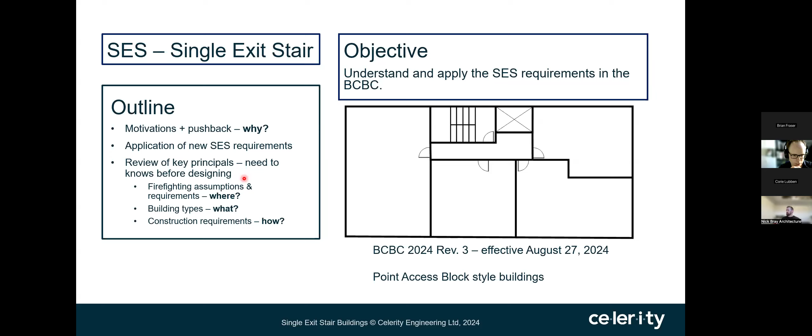In terms of outline, we're going to discuss motivations and pushbacks, why this is coming up now, what we're hearing in terms of pushbacks against these requirements in the industry, go over the application of these new requirements, the mechanism in the code for how to make this work. And then we'll talk about the key principles, what you need to know before designing. This includes where can you build these, mostly related to firefighting assumptions. What do these buildings look like? And all of these specific construction requirements, which I'm calling the how, the nitty-gritty stuff.

So why is this coming about? The primary motivation for this is related to housing supply. So it was a BC government-led initiative. They worked with private industry to study how this could be done in a code revision, and that went through, I think, several peer review processes and was implemented. So it didn't go through the normal national level code review.

That hasn't happened. I believe probably the main reason for that is that's a fairly slow process. You know, there's a new code that comes out every 4 or 5 years. If they wanted to get into that code cycle, they certainly could have, but we wouldn't have seen anything in BC for probably, I'm guessing, at least 8 years. So they wanted something faster than that, so they've gone through a different process in this case.

Another motivation is density on smaller lots. With the 2 exit stair design, it can be quite challenging to get your 2 stairs on smaller lots, so you end up with land assembly and higher costs due to that. You can do scissor stairs and things, but it gets a little bit tricky.

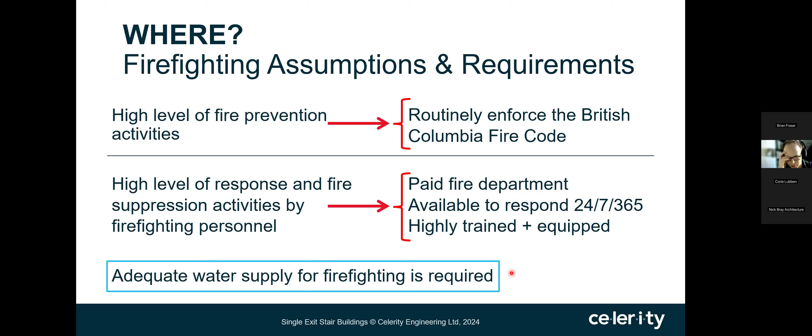Okay, so that's a lot of background information. I guess one additional thing I should mention, sorry, before we move on, is where you can do this. So when the encapsulated mass timber requirements were brought into force, there were specific jurisdictions that opted in to allowing them in their jurisdiction. These requirements are not like that. It just broadly applies everywhere. There's no specific jurisdiction opt-in. It's really just, do they meet the criteria for the firefighting assumptions? That's kind of what it all comes down to. There's no opt-in type of situation like the encapsulated mass timber had.

Okay, so what do these buildings look like? This is probably where most of the interest will be, I think. It'll help you figure out what you can do with these new requirements. So the most significant thing is that these are only for residential buildings, and only specific types of residential buildings, which is general market housing. You're not allowed to use it for hotels, motels, dorms, senior residences, and other types of specialized residential occupancies. So general market housing is all that has been considered when coming up with these new requirements.

One thing that I've noted as I've gone through these and looked at a few projects is there's no commentary on subsidiary uses like parking or storage. It doesn't really address that at all. It doesn't say if it's allowed, or, for example, if you do have underground parking, are you allowed to have only one exit from there? Can you have two? I'm not completely sure about that, to be honest. It doesn't seem clear to me. So I think that's a topic for future research, for an update at some point.

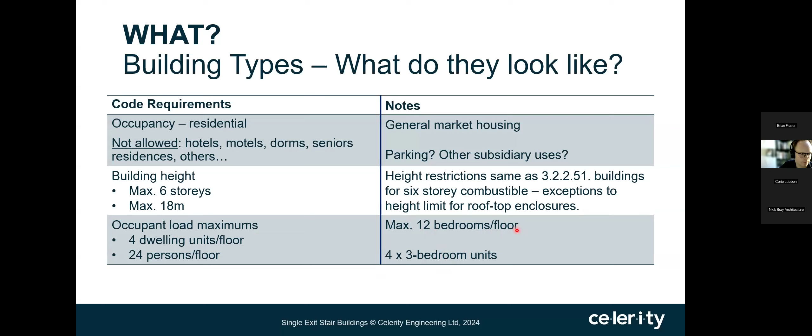Occupant load maximums: the code limits you to 4 dwelling units per floor and not more than 24 persons per floor. So essentially, this means 12 bedrooms per floor. In practice, that might look like four 3-bedroom units. You usually don't see anything over 3 bedrooms in apartments, but you could have over 3 bedrooms in a unit as long as you're not exceeding the 24 persons per floor. The 12 bedrooms per floor is just based on the 2 persons per bedroom that's typically applied for occupant load in the code.

Okay, continuing with what these look like. Travel distance is another significant thing that will effectively limit the area of these buildings. So although, based on the 3.2.2.51 construction article, you're allowed up to a certain area limit, I think the travel distance limits in here will effectively reduce that. You won't really feasibly be able to go close to that limit, I don't think.

So we have 25 meters to an exit from the furthest location. You have to look at every location on your floor, and whatever the furthest is has to be a max of 25 meters to the exit door. And note that's actually all the way to the exit, not to the suite door. There's no allowance for measuring it to the suite door. So it's quite small, and that's consistent with the existing single egress requirements for a sprinklered building. And then the other thing is a 6-meter travel distance from the suite door to the exit within the public corridor.

And one thing that's interesting: keep in mind that the dead end corridor limits still apply. So in this example here, if this was 6 meters to the exit door, that would be fine. But if you put the exit door over on this side, it wouldn't really work anymore, because these doors over here would probably be over 6 meters, and the dead end distance from the door to the end of the corridor is over 6 meters. So then it doesn't work on 2 fronts.

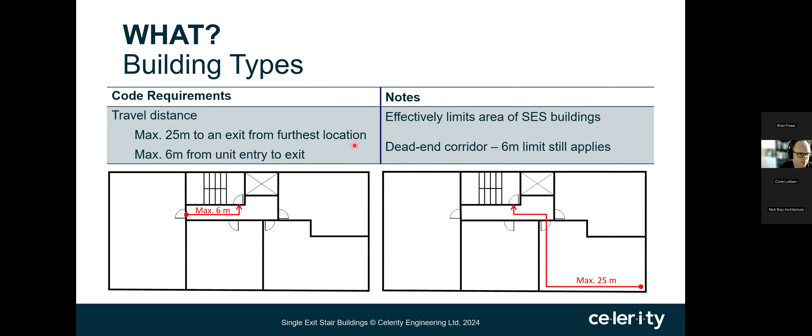Furthermore, if you put this door over here, for example, if you had a corridor in the suite, you might be under the 6 meters to the exit, but if you were over 6 meters to the end of the corridor, you wouldn't be meeting the dead end corridor requirements. So there are 2 things to consider there: the travel distance from the suite doors, and the dead end corridor requirements.

And well, okay. So that effectively limits you in how you can configure your floor, because you do need to have this stair relatively close to the street. So it's definitely something to consider early on in your design. You don't want to have to totally rearrange your units later on once you realize this.

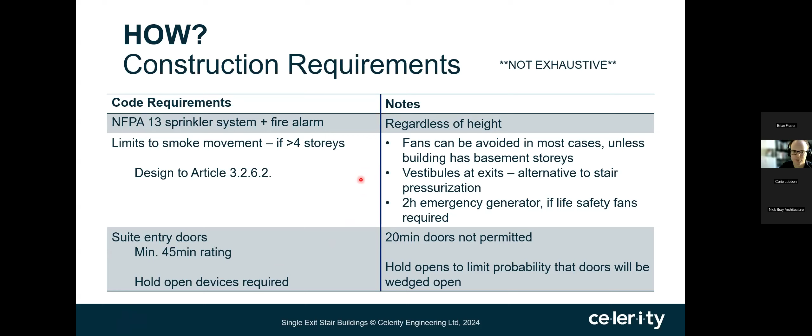I've seen some on a project recently that aren't the typical wall mounted magnets with the two plates. I've seen some that have some sort of electromagnet inside the closer itself. So you can just kind of move the door to any position you want during normal operation and it'll just stay there. But if the fire alarm goes off, then it releases that and it just releases like a normal closer. So there's some options out there, I think, that are a little more pleasing aesthetically than the sort of traditional magnet that you would see for doors in a public corridor, for example.

In most cases, you're going to have drywall finishes for the ceiling and the walls, so that shouldn't be a problem as long as it's typical paper-faced drywall. It will add in a requirement though for floor finishes to be considered. So you will want to look at the flame spread rating and smoke developed classification requirements of the table for the floor finish.

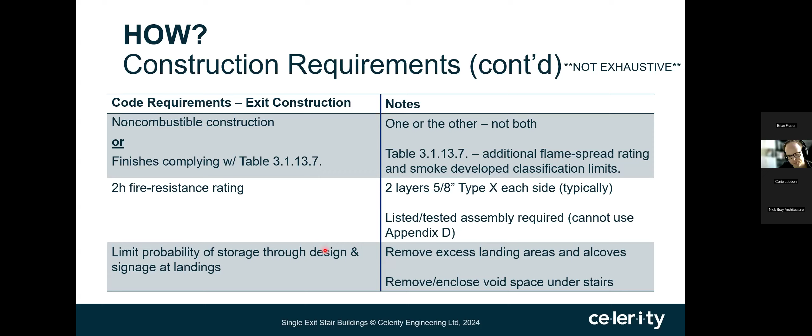I know in my last strata I was in, we had a snowblower stored under the stair for a while, which is definitely not allowed. So these things happen. So it's good to proactively design that out. And I think that's something that should be considered really in all buildings. Although it's limited to this in the code, it's definitely something to consider.

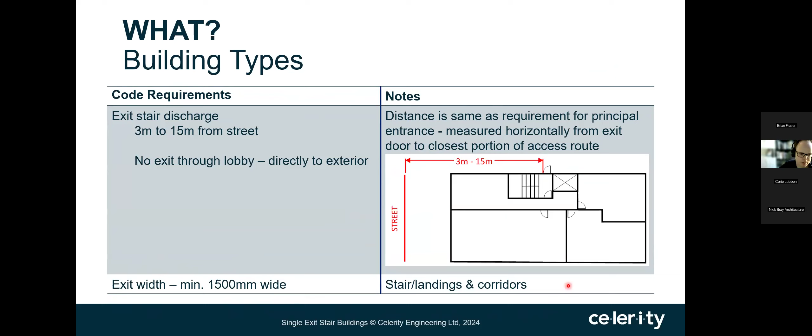I realize I did miss one extra thing here. Exit width. These buildings need to have 1,500 millimetre wide exits. So that includes stairs and corridors if you have a corridor as part of your exit. So that's fairly critical also at the schematic stage where you're blocking everything out. So you definitely don't want to miss that like I almost did.

I think that's it. Thanks for listening. I know that was a bit of a gauntlet, but hopefully it was helpful.

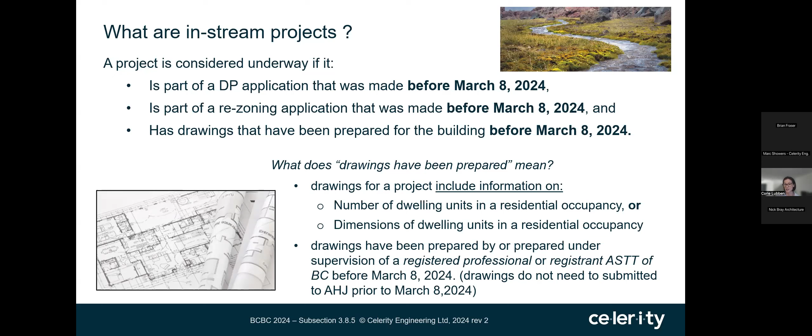So as we know, that includes an architect with AIBC, a professional engineer or professional licensee engineer with EGBC, as well as a registrant of the applied science technologists and technicians under the Professional Governance Act. And so that seems simple, but what this really means is if we are applying one of these three options, the criteria is as of March 2027, which is a long time out, but you need to have those in-stream projects in for building permit application.

And so the purpose behind all this, as has been raised out there, is really to address all the concerns that have been raised by industry, not only costs, but things that have impacted projects with redesign or redevelopment applications, really the feasibility of these projects and moving forward with the changes required to meet the new 2024 requirements when substantial effort has been made ahead of time.

So, as I said, there is an information bulletin, and I urge you all to read it. It's got lots of good information. I just highlighted three of the questions that seem quite informative. So one is, do the drawings need to demonstrate the floor space changes or impacts as a result of the 2024 edition? And the answer is clear, it's no. As long as your project meets one of those three criteria, so the development permit application, the rezoning, or the drawings. And again, that drawing one is a very unclear one.

And our recommendation is really to reach out to the AHJ that you're working with, because it is interpreted kind of gray. There are some opinions out there that these drawings are only submitted because there was no development permit or no rezoning application. So maybe the municipality doesn't have those features required, so you're looking more rural, but there is no consensus and no solid information. We're hoping that something else gets published, but right now you're best to just reach out to the AHJ, see where they stand on it, and go forward from there.

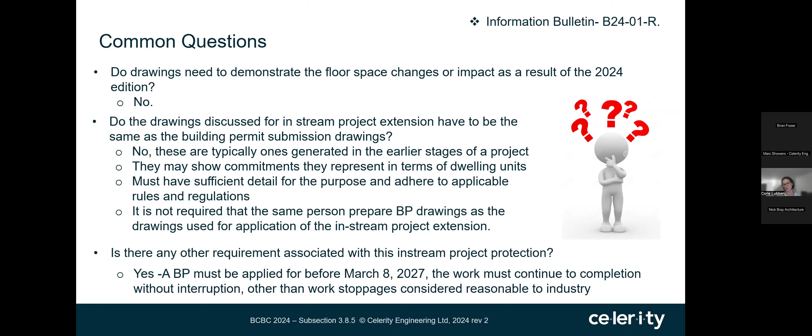And then the last question that I found pretty useful and clarifies things is, is there any other requirement associated with in-stream project protection? And that just reiterates again that although you fall under this, you do have to apply for your building permit by 2027. And again, they're sticking with March 8th.

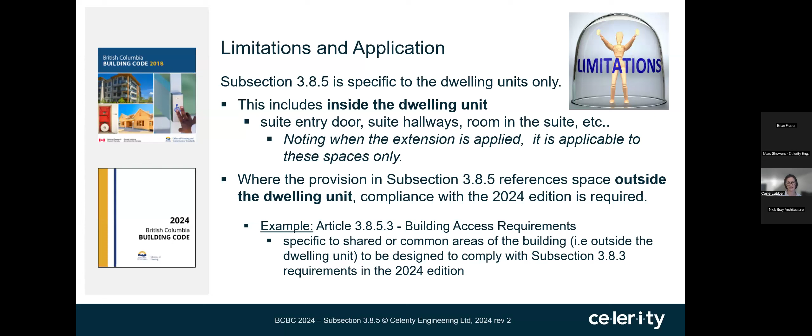So moving forward, these are applicable only to the adaptable dwelling units requirements, and that's section 3.8.5. So specifically, we're looking at the single-storey dwelling units served by that interior corridor and accessible common entrance, as well as common spaces. So we're limited to within the dwelling unit: the suite entry doors, hallways, all the rooms, everything inside. That's where the exemption to apply the 2018 requirements applies. Within 3.8.5, there are requirements that reference outside of the dwelling units, and those are still required to comply with the 2024. So that is good to keep in mind.

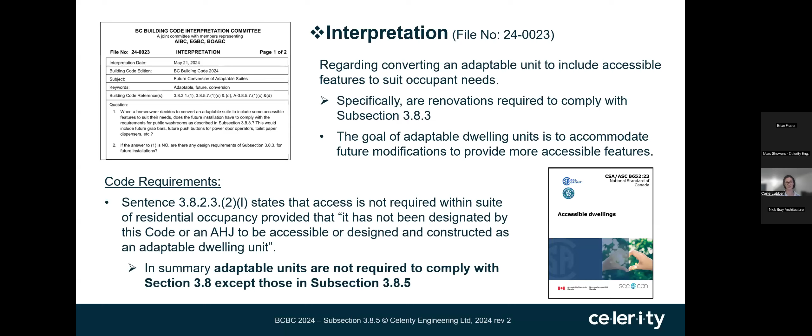So as I said, lots of interpretations are going on. This is one that's very general. Someone was inquiring about doing a conversion inside the adaptable dwelling unit, whether they need to comply with the accessibility requirements. And again, clear answer on this is no. The intent of the adaptable dwelling units is really just to allow the user to make modifications, and those can be different for every user of that space. So there's no requirement to meet the 3.8.2 or 3.8.3 requirements. It is just for the user only.

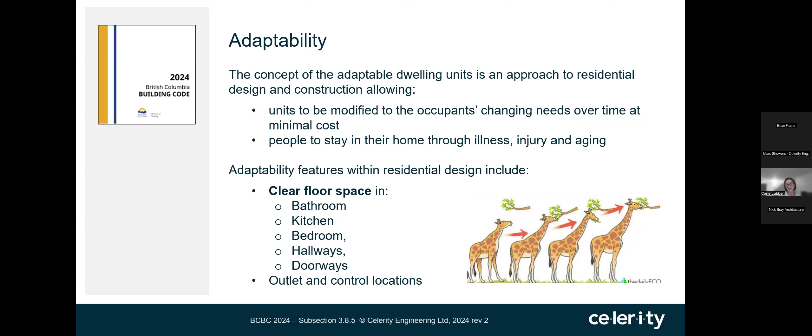And just a quick highlight that we are focusing on having people stay in their place, whether it's injury, aging, or illness. So we just want that space to be easily modified. And as we go through all these adaptability features, you see the focus is really on clear space, because that's something we can't achieve without a major renovation. So there's clear space throughout all the rooms, and then locations of switches is the focus.

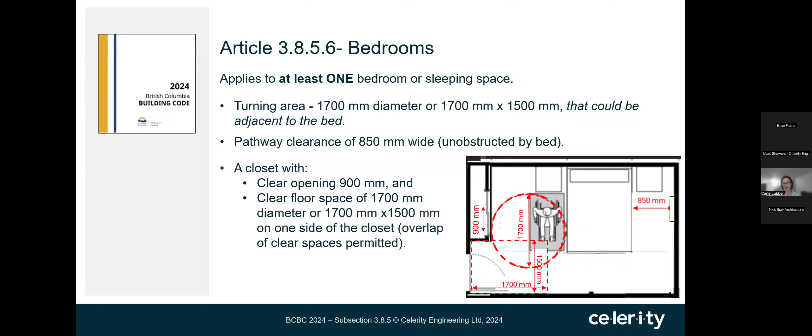One of the new articles within the adaptable dwelling units is the bedroom. And so within it, there's 3 basic criteria. One is for a turning space, could be adjacent to the bed, essentially a transfer zone. You need a clear space in front of the closet, the door, and then an 850 pathway.

This is where there was lots of room for clarification based on how they presented this. And so luckily there's lots of interpretations as well as information out in the bulletin. But one of the interpretations published was very clear that we do not need to show that double bed. That is not mandatory. And the 850 millimeter pathway only requires access on one side of the bed to that transfer zone. The path is required throughout the suite to any kind of controls that are used often, switches or operable windows.

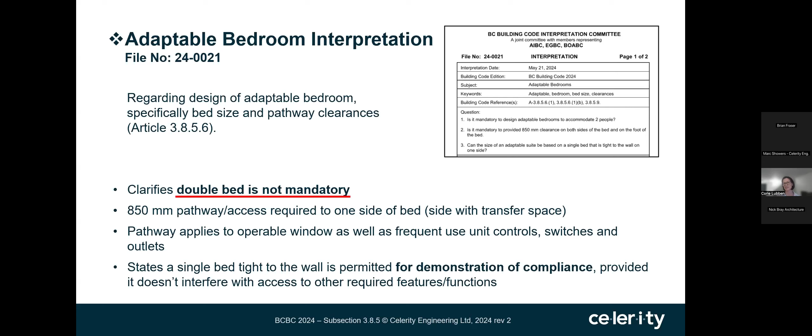But it clarifies that if you want, for demonstration purposes, to show that you're meeting these adaptable requirements within the bedroom, you can have a single bed. It can be up against the wall, as long as there's nothing on that wall or you're blocking space that needs access. So that's definitely clarification. It does also allude to the fact that we have these demonstration of compliance. So noting that we are showing it's available, but it's not necessarily going to be the way it is constructed originally or requiring the furniture.

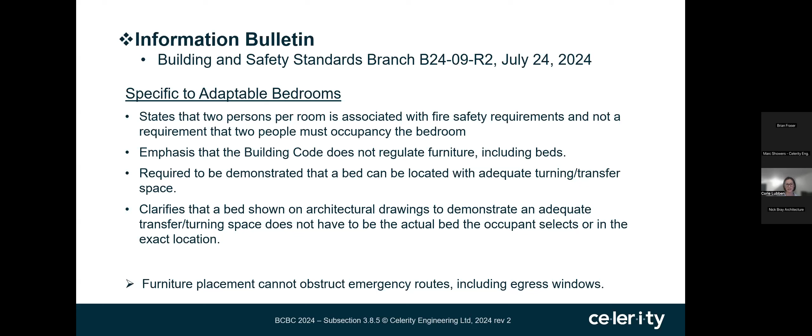So the information bulletin has some more clarification why at the beginning there was a lot of leniency, like, do we need that double bed? And again, they just clarified it for everyone, stating that 2 persons per room is actually more of a fire safety requirement. And so obviously we don't mandate furniture or anything within the building code, nor do we require 2 people to be within the room. So there is that flexibility now on the choice of bed. And again, it does clarify in these bulletins that there is a demonstration drawing, that it doesn't have to be the bed the occupants select moving forward.

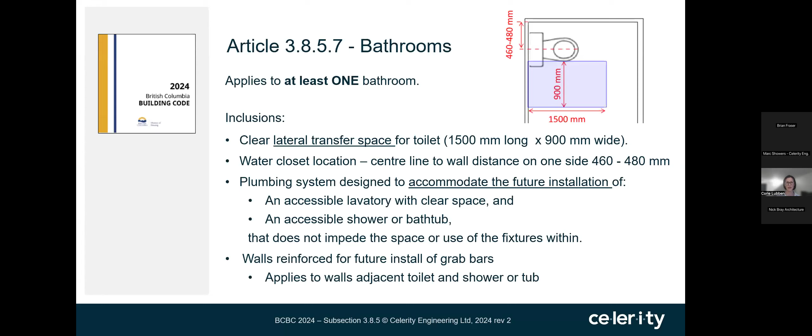So the bathroom is another area. I find there's loads and loads of information out there. So I urge you all to look through the new bulletins and information that's out. I'm going to touch through a little bit. I know we are tight for time today, but essentially the bathroom requirements, we have the lateral space. We have the location of the toilet and the wall. We talk about plumbing fixtures and accommodating the future installation of sinks and showers or bathtubs, and so the clear space needed around it. And then we have the future reinforcement of the wall to accommodate the grab bars.

So one of the great interpretations I think out there is about the toilet. So that water closet is fixed. You need that in your initial design. That just acknowledges that any kind of moving around of your toilet is really a major renovation. So that's the things we're trying to avoid within the adaptable units. So you do have that fixed against the wall, but the water closet is an initial design type thing.

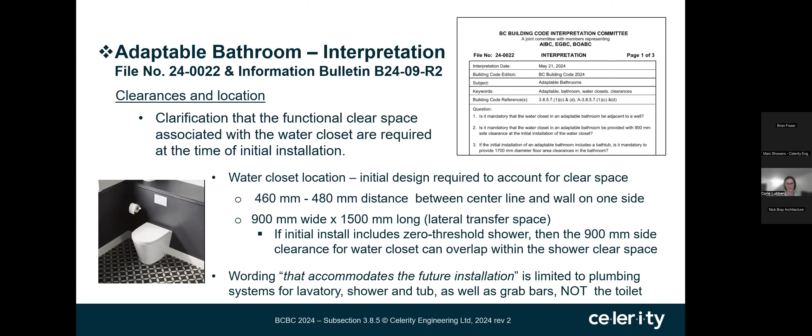Within this interpretation, they do clarify about a zero threshold shower, which is quite interesting. So because your toilet is in your initial design, if you have a zero threshold shower in your initial design too, then you are allowed to use that clear space as overlap for your transfer space in the toilet. So there is encouragement to use the clear spaces that are required for multi-purposes. You don't need to isolate them beside each other. We are allowed the overlap. So with the zero threshold shower, again, that transfer space is allowed to overlap into the shower, which is quite nice.

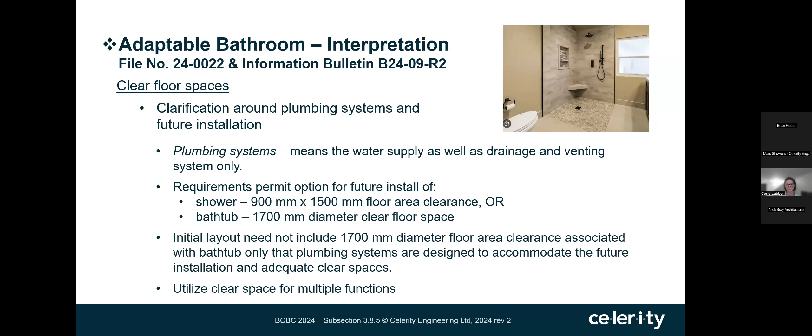Just some more interpretations, clarity around the plumbing systems and what that specifically means, and the installation of the future shower or bathtub, and whether it needs to incorporate that 1700 millimeter diameter clear space. And again, no, it's just the plumbing systems we're looking for, but it does need to account for that clear space in the future design. So there are a number of these interpretations out there.

This is the last one I really want to touch on, and it talks about having a future wall hung sink and whether it can encroach into that clear space of your transfer zone relating to the water closet or the toilet. And so the answer is yes. Within the notes, we also talk about it being permitted to encroach in the clear space of the shower as long as it's opposite the fold down bench.

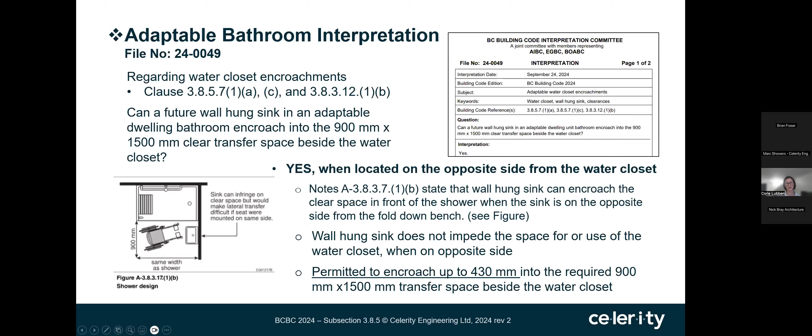So again, as long as the wall hung sink is opposite the water closet, you can have that encroach in the space. And again, it's going to be that 430 millimeter encroachment permitted with the knee space and the clearance underneath the sink. So those are the highlights of the interpretation.

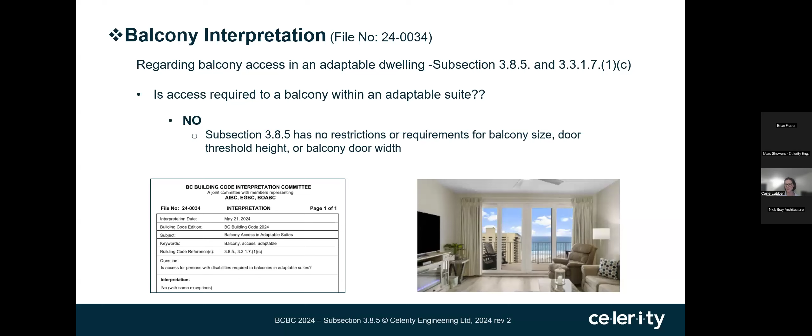There are quite a few more out there. I will leave them in our slides that we'll probably distribute to everyone. But today, with our tight space for time, I'll just touch on the balconies. They do not need to be accessible. That's another one that always comes up through our office. So they are in an adaptable unit; they are not accessible. And then in closing, I'll just highlight, the code is the minimum, but you're welcome to go beyond always and just feel free to practice good design.